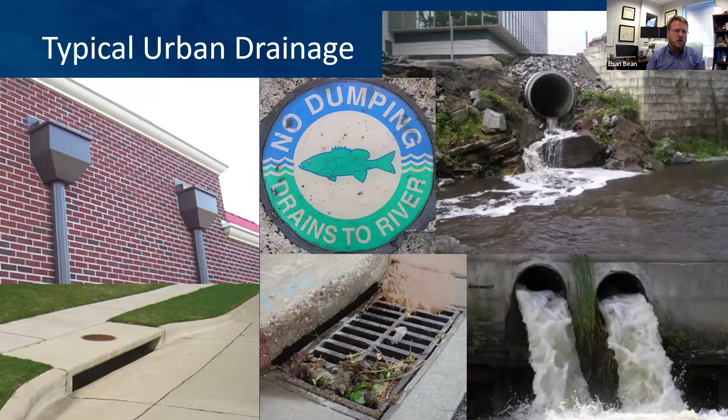And so this has created some issues. One of them being that if you're getting all the water off site, that's good for you. But if all that water is coming to you and your property is the one being flooded out, it's not such a great situation.

One of the other aspects of this is that there's a wide range of pollutants that can be transported from the urbanized or developed areas through that runoff, anything from nutrients, which we see the impacts of in algal blooms, whether inland or on the coast. We have sediments, pathogens all over the place, organic debris and atmospheric deposition as sources of that material, and then metals and other complex compounds.

Eventually, our approach really started, and this is not just in Florida but across the country, trying to address the most common pollutant everywhere, it seems, other than Florida, which is sediment, using stormwater ponds to capture that water. As that water slows down entering the pond, that sediment drops out. These ponds were also initially designed for flood control, capturing that water, slowly releasing it, and limiting the flow rate so we didn't have downstream flooding and channel erosion.

And our sort of conventional approach has evolved to this day to be fairly efficient from the drainage side, getting water off-site from our impervious source areas, rooftops, driveways, into gutters, into storm drains, and into the ponds. One of the things that's happened is, as sediments were pretty effectively removed from stormwater ponds, there was an assumption that a lot of the nutrients could also be removed from stormwater ponds.

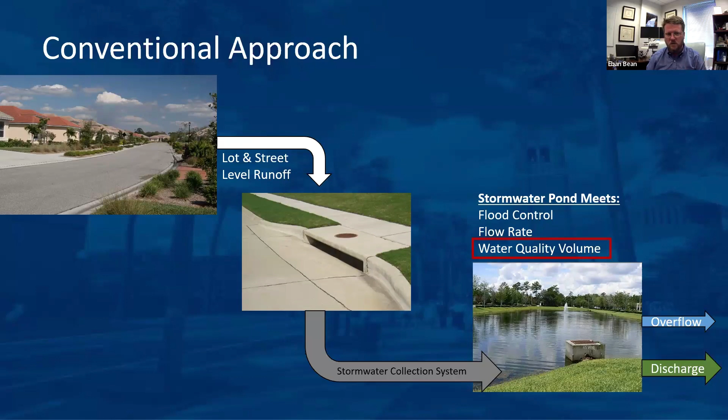This was due to an assumption that nutrients were fairly well associated with those sediments. But if you're familiar with some of the work that has been around for quite a while from Harvey Harper on the function or effectiveness of stormwater ponds, you've seen that many of our ponds are not meeting the presumed criteria or assumed performance of removing 80% of those nutrients.

The graphs on the top are summarized data from the International Stormwater BMP database, just looking at concentrations of inflow and outflow from stormwater ponds in Florida. The trends line up well with what Harvey Harper shows at the bottom. Essentially, what we see with nitrogen is that we get maybe a 25%, maybe 30% drop in the concentration, not looking at loadings. Loadings are at the bottom.

I'll go into the mechanisms for why this is happening in a moment. But we see with phosphorus that we get a much better removal from the concentration standpoint. We get about a 2/3 reduction in that concentration. Comparing that with our loading reduction, that shows that we do achieve that 80% once the detention time gets up near 150, 175, 180 days in the stormwater pond.

And this makes a lot of sense if you understand the chemistry behind it. Phosphorus and phosphate bind to sediment particles, and as those particles continue to drop out, the finer and finer ones taking longer and longer to fall, you're getting better and better phosphorus removal.

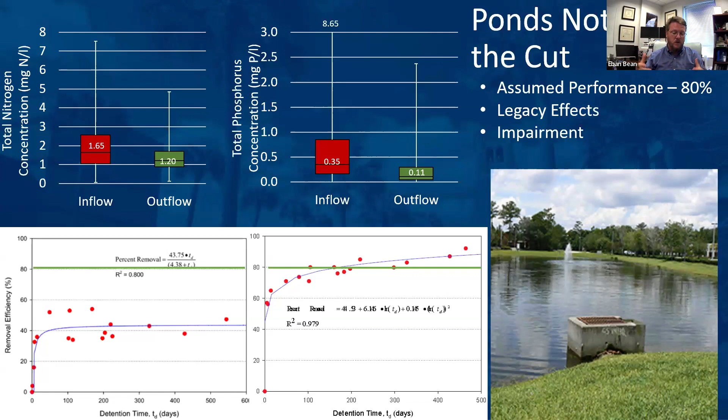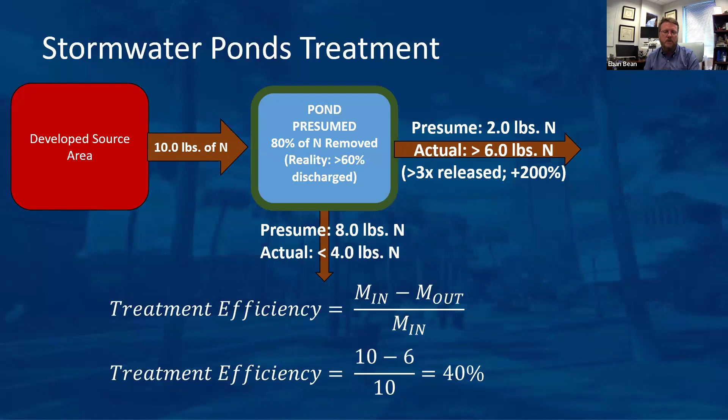And so the assumption that we're removing 80% of our nitrogen from the landscape, this is just a simplified conceptual calculation here: 10 pounds of nitrogen coming off, we're assuming 80% of nitrogen is removed. In reality, maybe we're only getting 40%. Well, that really means we're getting about 3 times the amount of nitrogen that's discharging. We were assuming maybe 2 pounds of nitrogen was being discharged, but in actuality, we're discharging about 6 pounds or more. So that's just laying the groundwork here.

One of the things we see is that our urbanization is essentially driving some of our impaired water bodies.

We look at land use on the right. For this area of Central Florida, we can see that the urbanization, the red areas, kind of overlap with a lot of the areas that are impaired. It's probably an argument to be made that some of the areas not currently impaired on the left are just not impaired yet, or haven't had time to become impaired. If you see the overlay here, there's pretty good agreement between the areas that are impaired and the areas that are urbanized, although to be truthful this looks a little better than many other places in Florida as far as urbanization and impact on urban water resources.

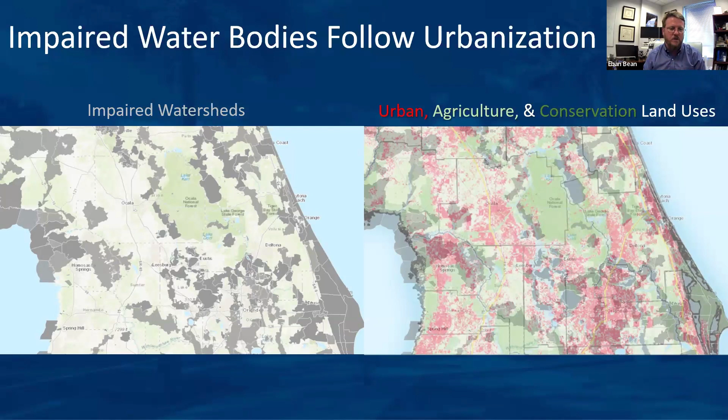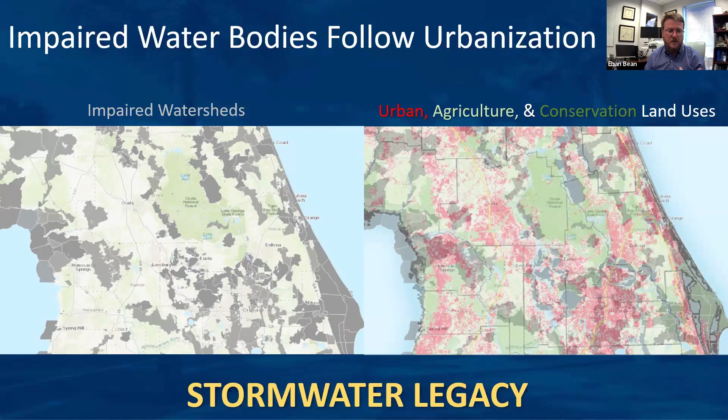But this does create a lasting stormwater legacy, particularly when we think about how difficult it is to come back in and adjust, change, or upgrade stormwater infrastructure that was permitted decades or generations ago.

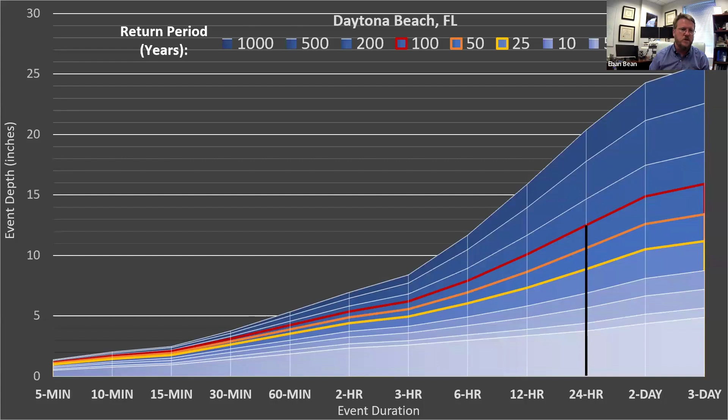One of the things with stormwater ponds is that they're typically designed for that 25, 50, 100-year storm event, depending on the criteria for the location. Let's take a location in this East Central area, Daytona Beach. Looking at the distribution of storm events, we're looking at anywhere from an 8-inch storm event for your 24-hour, 25-year event, up to maybe a 12 or 13-inch event for the 100-year storm. So it's a pretty big storm event - these are typically your hurricanes, your tropical storms, your random cloud burst storm events.

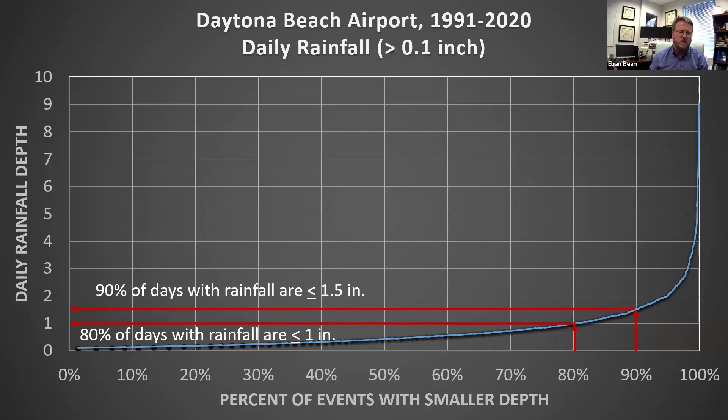The flood control and flow rate control aspects of detention ponds and stormwater control systems are kind of at the opposite end of the spectrum from the water quality size storm events. These are the everyday afternoon storm events that are transporting nutrients off the site. It's important to understand that these are happening at very distinctly different timescales.

When we think about how this has occurred over time, our stormwater management goals have evolved over time, since maybe even some of the drainage goals before the 1960s, we had perspectives on needing to manage stormwater in various ways. But there wasn't really a concerted and coordinated effort, particularly not from the federal level, to enact regulations and requirements. Over time we started to recognize the impacts of flooding, and those were the primary - and that still remains the primary goal of stormwater management - flood prevention and flood mitigation, so we can protect people's safety, lives, and property. But over the years, different topics and goals started to come into the overall picture.

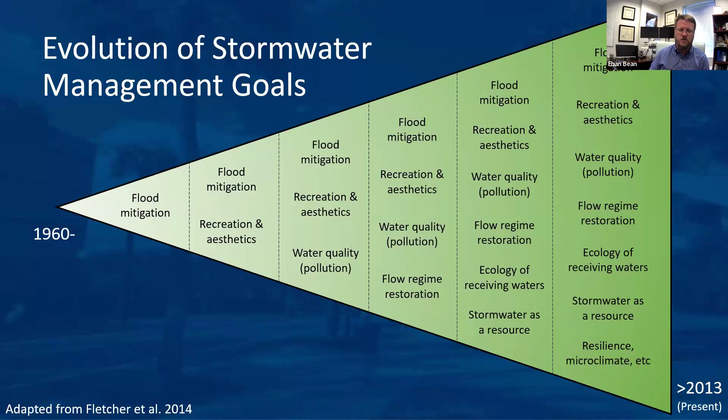Trying to protect the recreation and aesthetic qualities of our water resources, addressing the pollutants being discharged in stormwater runoff, starting to evaluate flow regime and the ecology of the receiving waters and how stormwater management can impact, preserve, or enhance those. And recently, we've seen the emergence of stormwater as a resource, which used to be something just on the West Coast from a water supply standpoint. But we're seeing those water pressures emerging here in Florida, where stormwater is now starting to be seen more and more like a valuable resource to manage.

There's another figure that shows this transition or evolution. This one is a little more up to date, and it aligns with the UN Sustainable Development Goals. And I'm getting to how this relates to nature-based solutions - it really comes into the terminology.

When we think about low impact development, that's the terminology used in stormwater regulations. A lot of what we see here is similar to the previous graph. We had the Clean Water Act, the NPDES program, and then a second generation looking at flow regime restoration—managing the long-term continuous discharge of flow rather than just event-based approaches. A third generation looks much more at the broader holistic incorporation and valuing of stormwater, managing it to improve and maintain the ecology of receiving waters, using stormwater as a resource, improving resilience—a big topic across the state—and addressing aspects of climate change.

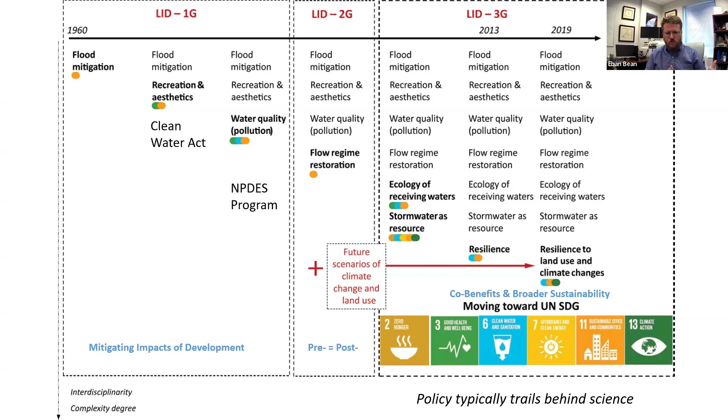One thing we see time and time again, important to put in context, is that policy is almost always trailing behind the science. You'll see that in a moment.

This is another figure, one of the earlier ones that helped me distinguish and understand the differences between these terms. It's an internationally compiled graphic listing different terms based on the primary focus of the term. On the vertical axis we have urban stormwater management, but also broader whole urban water cycle management—think of one water supply relating to urban stormwater management. On the x-axis, it looks at specific techniques, whether structural or non-structural, expanding into less structural practices, concepts, and broad principles.

All of this is under the umbrella of green infrastructure. Here we have different terms like water sensitive cities, which have that integrated urban management—a very broad, conceptual principle that ranges from whole urban water management to stormwater management practices. Low impact development, low impact design—we'll get into those definitions in a bit—are again conceptual, broad principles with a specific focus on stormwater management, but link to and reach up toward whole watershed or whole urban water cycle aspects.

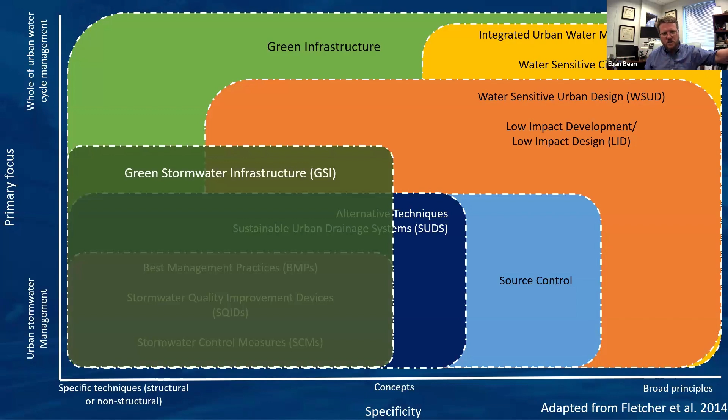Consider the term green stormwater infrastructure, understanding that infrastructure is essentially everything that provides services to society around us. We have telecommunications infrastructure, wastewater infrastructure, power and energy infrastructure, and stormwater infrastructure—typically our pipes and drainage, control structures that manage stormwater flood control and other goals of water quality and so forth.

The green aspect here is really two things. Number one, the green is the vegetative side, bringing in the living or biological component to enhance stormwater infrastructure or utilizing vegetated systems as part of our green stormwater infrastructure. As a comparison, there are examples of green infrastructure that don't necessarily apply to stormwater infrastructure, which I'll show in a moment.

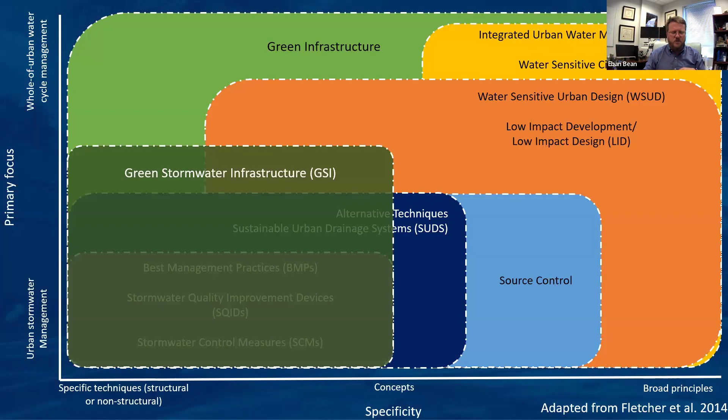We boil this down to look at where there's overlap between these terms and topics. Green stormwater infrastructure, if we break out nature-based solutions and so forth, occupies a very similar space. Nature-based solutions, green stormwater infrastructure, and LID are oftentimes used interchangeably—and at first, that's something I did too. But I hope by the end of this you'll have a much clearer understanding of what those terms mean and what practices fall into one but maybe not the others.

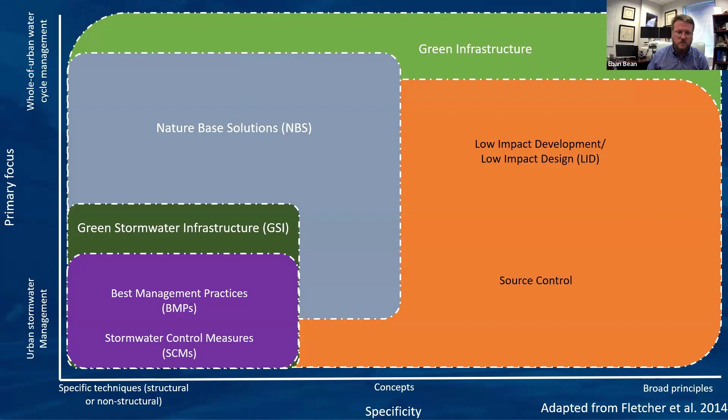I've tried to simplify this and plot out where nature-based solutions fit. I think of nature-based solutions as essentially natural infrastructure that solves or addresses our needs or provides services to us. Green stormwater infrastructure is primarily focused on stormwater management, but nature-based solutions can be more than that.

So if we look at examples of practices that map onto this, we can start to understand where they fall. In the best management practice or stormwater controls category, we have stormwater ponds, permeable pavements. Permeable pavements are sometimes green stormwater infrastructure, but they don't necessarily have the vegetation there. Infiltration practices are kind of the same thing.

As we get into stormwater wetlands, bioretention, green roofs, vegetated buffers, those are obviously green stormwater infrastructure, but they're also nature-based solutions. They have vegetation and rely on natural functioning and natural processes. You can even think of the self-organization of ecological engineering principles—that's essentially nature-based solutions and green stormwater infrastructure.

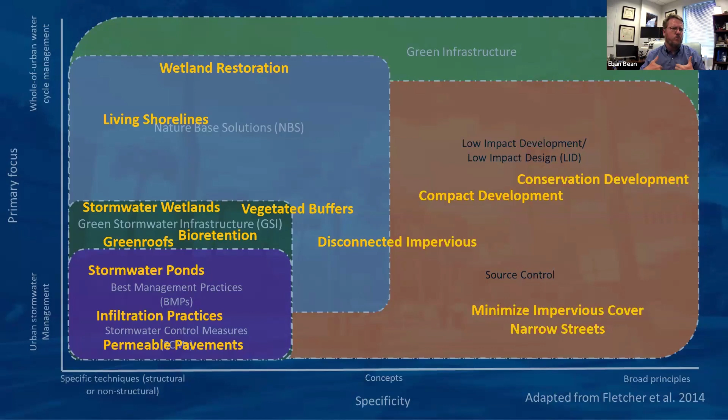Living shorelines, though, don't necessarily provide a lot of stormwater benefit in stormwater management. They secondarily do by preventing erosion in a stormwater practice, but living shorelines themselves aren't directly managing stormwater. Same with wetland restoration, and I want to distinguish that from stormwater wetlands. Wetland restoration is a nature-based solution—we're enhancing the natural system to improve water quality or retain water—but the primary goals aren't necessarily focused on stormwater management.

As we get into low impact development, these concepts overlap in this space, utilizing strategies like disconnecting imperviousness to allow impervious areas to drain onto green space. It's leveraging that green space and using the natural function there, tying all those together.

But things like compact development and conservation development are more broad principles about the layout of a site and how we optimize that to fit what the site offers. Other aspects less geared towards whole urban water management might be minimizing impervious cover and narrowing streets. That specifically targets reducing urban stormwater, but it's more of a broad principle or concept. You could argue it's a specific technique, but overall it's not managing the stormwater directly—it's trying to reduce the amount being generated.

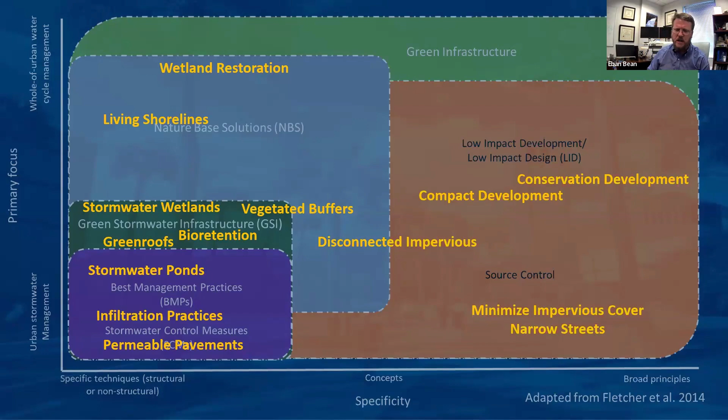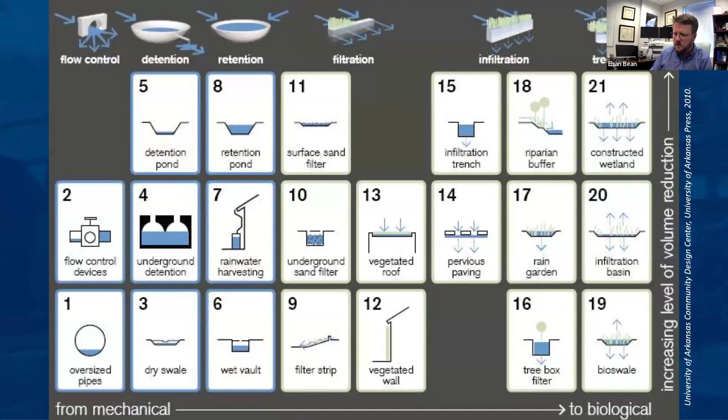So thinking about the distinction between nature-based and green stormwater infrastructure, this diagram helps illustrate it between stormwater practices. I like how it goes from mechanical to biological—just a note, the reference for this document is on the vertical axis on the right. Essentially, how are we migrating from typical stormwater management on the mechanical side to incorporating biological and ecological systems to provide services for stormwater management and treatment in our urban areas?

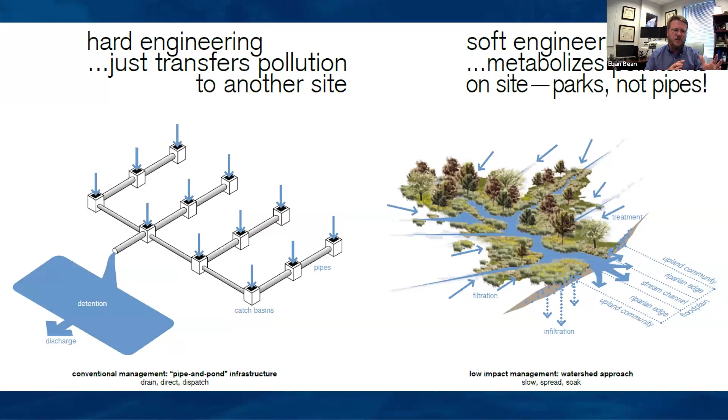If you think about this from a simplified, big picture concept, our conventional approach looks at pipes, catch basins, and ponds, which hasn't necessarily given us the best water quality treatment and efficacy. While the optimal picture on the right isn't a realistic image for an urbanized area to fully achieve or replace, it does touch on the approach of how we incorporate natural solutions into an urban area to provide similar or enhanced functions over the conventional approach.

So as I mentioned, I've started to differentiate between low impact development and green stormwater infrastructure. This became particularly apparent, as I'll show you, when we think about how regulations come into play or where those regulations are coming from. When we talk about low impact development, this really is the site planning and design strategy.

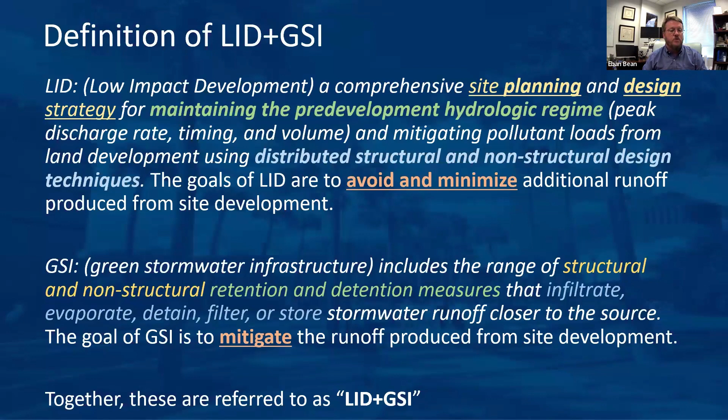This is at the very beginning of the site development process, looking at how we minimize how much of the site is altered and how much runoff is produced, with the goal of trying to avoid and minimize that runoff from the site. Green stormwater infrastructure are the types of practices—you can think of these as the nature-based solutions—put in place to retain, detain, filter, and store stormwater in the urbanized or developed area to mitigate what couldn't be avoided and minimized. So there's a lot of overlap there.

And this is what I mean by LID and GSI or nature-based solutions, going from the beginning of the development process through the engineered final plans. When we start out with a site, a lot of times the goals are mapping the natural infrastructure and looking at how we avoid disturbing this.

This is the conceptual broad principle of how we are strategic with where we place developed areas within the overall site to minimize those impacts. Then we're looking at minimizing the runoff by limiting those areas, enhancing or preserving some of those pre-development hydrologic features, and integrating practices that reduce or disconnect some of those impervious areas.

Finally, when we think about the water that could not be avoided or minimized from the site, that's where mitigation with GSI, nature-based solutions, and even our stormwater ponds for flood control come into play, employing those natural processes to perform the ecosystem services needed to achieve pollutant load reduction, flood control, and so forth.

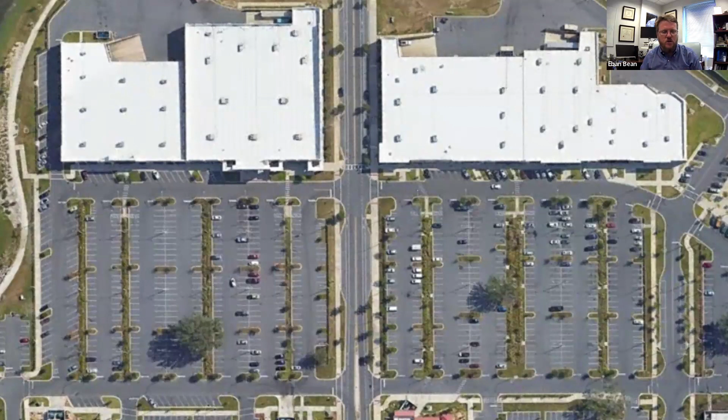However, there's a lot of parking and a lot of rooftop and a lot of imperviousness here, so it doesn't show efforts to reduce or minimize that imperviousness. Although you could argue maybe there's some attempt to disconnect the imperviousness with the swales or bioretention between the parking stalls, overall it's really more of what I would call green stormwater infrastructure, but not necessarily low impact development.

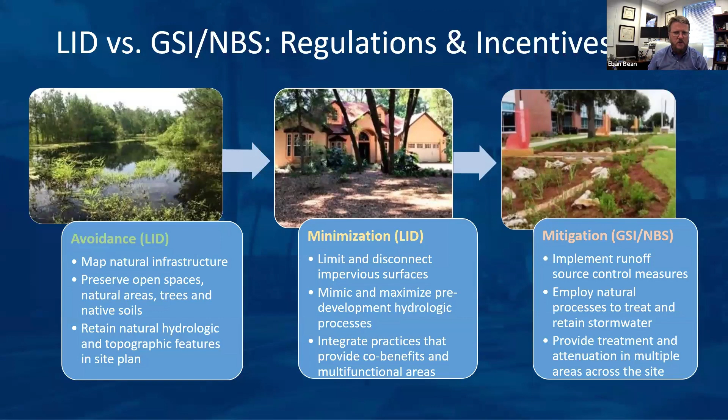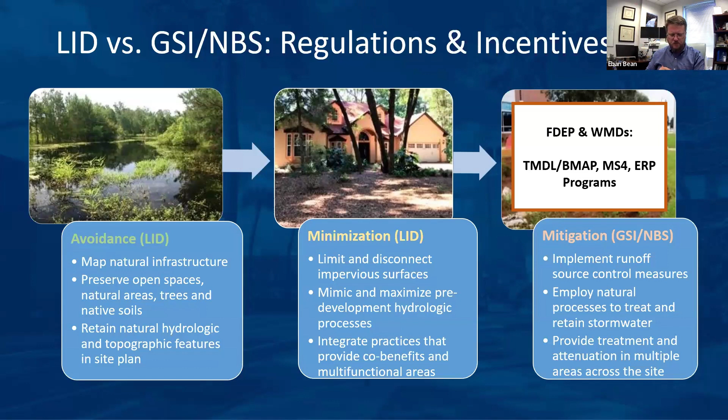Coming back to this concept and getting back to regulations and incentives, the regulatory structure that affects these processes as we think about the development timeline is a bit different. When we think about GSI, the green stormwater infrastructure, this falls under the DEP, water management districts. This is where the ERP program comes in, and a lot of the alphabet soup of TMDLs, BMAPs, MS4s, and so forth. A lot of that is really driven or controlled from the Clean Water Act, from the federal programs down to the state level and water management districts.

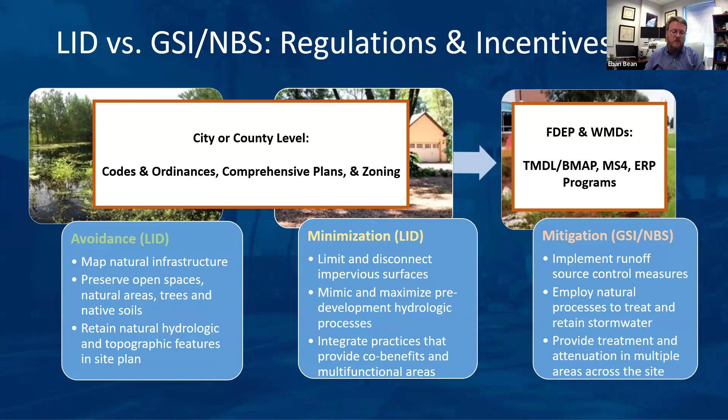But the other side of this, of the layout and how a site is designed, a lot of this comes from the local constraints and approval process that happens. And so there's a lot of things that can actually be done at the local level to improve and provide a fertile groundwork for green stormwater infrastructure and nature-based solutions.

One of the things that happens with codes over time, I was talking to someone recently. I said, codes and ordinances are not like a brand new house that was all well planned out and designed. It's like a house from the 1920s that has had 7 or 8 different owners, and each one had their own vision of what the next add-on or remodeling needed to be, and none of it really flows together. There's different flooring in different places. And so a lot of times there's unintentional consequences or unintentional restrictions or prohibitions that affect the use of green stormwater infrastructure practices or nature-based solutions.

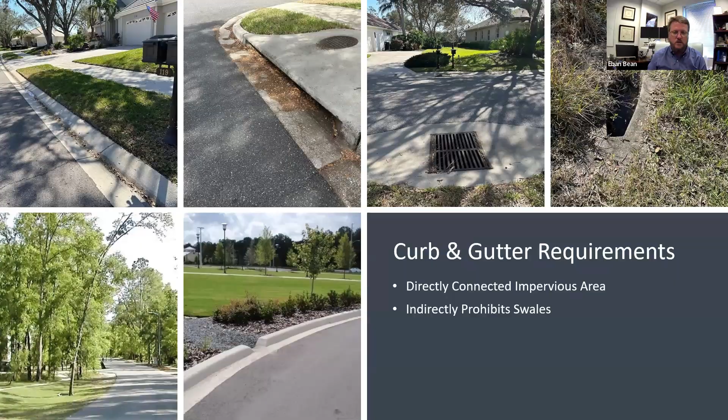One of those, for example, is the requirement for curb and gutter. This essentially requires that impervious areas be directly connected. If you were required to have a continuous curb along a street, there's not the opportunity for that to have a break in the curb and water to discharge into an open space that might improve the water quality, reduce that runoff, and reduce the overall runoff calculations. That sort of indirectly prohibits swales.

The use of traffic islands and medians, there's regulations or local codes that restrict or prohibit how those islands can be used. If there are limitations on being able to utilize that space, that green infrastructure opportunity, then you're not going to be able to take advantage of that and incorporate it into the stormwater system.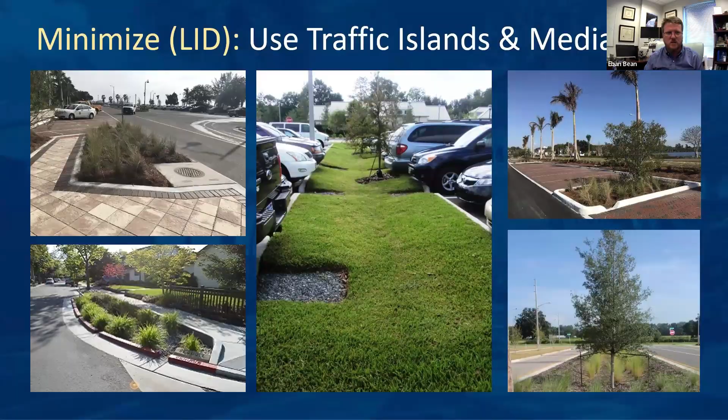This looks at another lens on this same site: the relationship between high parking amounts or minimum parking requirements based on square footage of the stores or businesses, and the overall imperviousness. This is particularly relevant to commercial and residential codes, where it essentially artificially increases the amount of impervious areas. There are some opportunities to change the requirements to allow, for example, pervious parking in some of these, or reduce the parking requirement minimums.

Particularly when there is seldomly used space or timing differences for businesses operating at different times—for example, maybe you have a store that operates typically 8 to 5 Monday through Friday, and next door is a house of worship with a service once a week, when the majority of parking they need is being done, and those don't overlap. There's not necessarily a reason to have duplicitous parking for both of those.

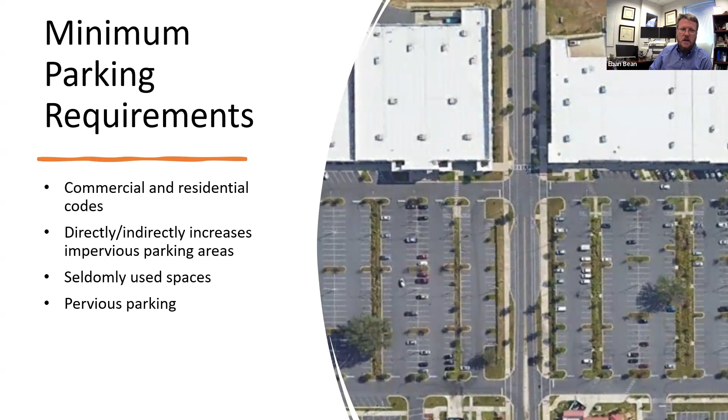One of the things we've looked at doing, and helping communities to do, is audit their codes and identify where these restrictions or prohibitions are. We developed a tool that helps identify weak areas that could be addressed or improved when the opportunity is right—for example, when the county or city commissioners makeup is open to making changes or wants to prioritize those changes, this is one tool available to be used there.

The code audit tool, just to touch on it, breaks the code audit process into about 16 different categories, and every question is scored on a scale from 0 to 4 based on how it is either prohibited all the way up to being a required practice. That scoring provides the basis for identifying where you have higher scores, or stronger codes, versus lower scores that are maybe not as encouraging, or are more restrictive.

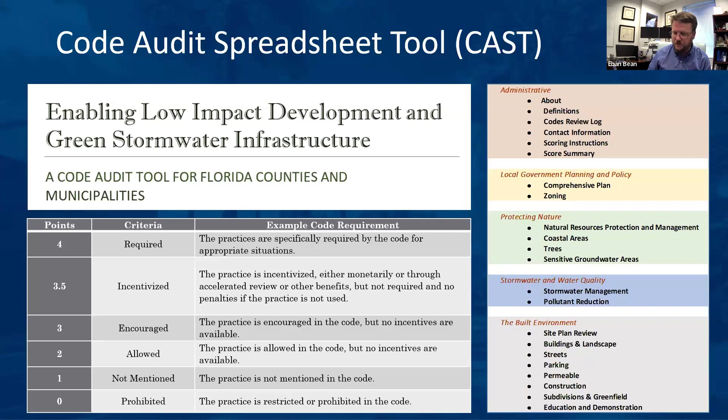But the other side of this—we talked about the local side, but there's been a lot going on the state side and the ERP side. Many of you are probably familiar with the recently passed and approved stormwater rules for the ERP program that are going to essentially take effect around the middle of next year.

Some of the main changes were changing the way criteria is defined, from a presumptive criteria to a technical, or basically technology-based, criteria—I'll touch on that in a moment. It also looks at the aspect of net improvement and performance standards, making sure that's more uniformly and consistently applied. It also provided a way to offer additional stormwater practices, BMPs, GSI, or nature-based solutions that can be used rather than having to go through such a huge process. It provides a framework and a list of those options.

I think it provides a groundwork for this being able to evolve and become better over time. One of the other main things was that it strengthened the requirements for operation and maintenance of stormwater systems. I'll talk a little bit about that here in a moment later on—we're involved in some aspects of that.

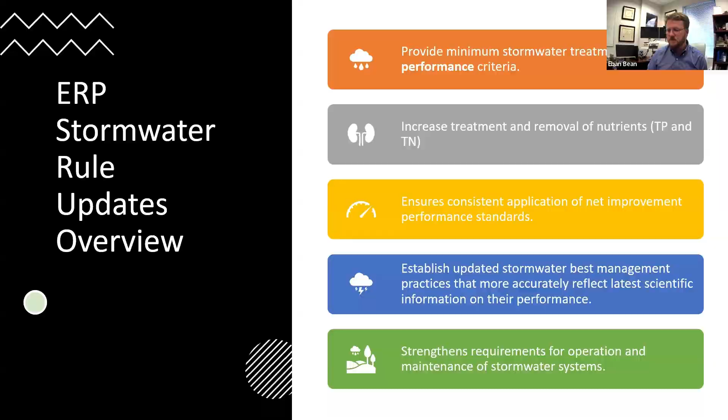Just to touch on more specifically the change happening with the stormwater rule: the water quality requirements for stormwater are going from this technology-based presumptive compliance to performance-based. I apologize, I think I used technology-based where I meant performance-based on the slide before. But essentially the structure overall is going to remain mostly the same, other than how you determine the performance of certain BMPs and how they're going to achieve the load reductions.

For example, one of the things that has changed is that for all non-impaired sites, instead of total nitrogen having to be reduced by 80%, it only now needs to be 55%. But that's not a presumptive compliance—that is performance-based, and it has to be based on data collected and monitoring of those practices to show how they are actually achieving that.

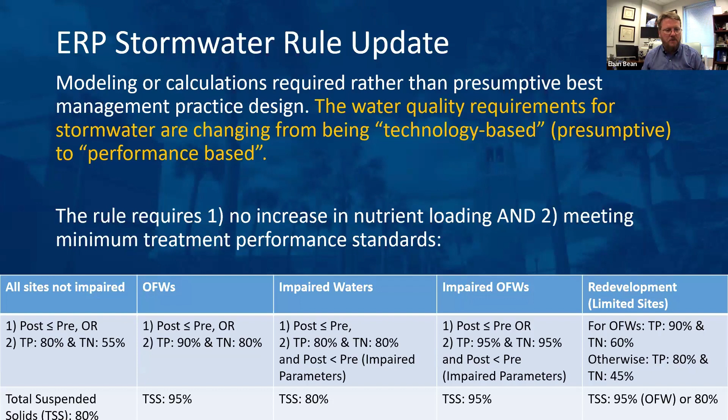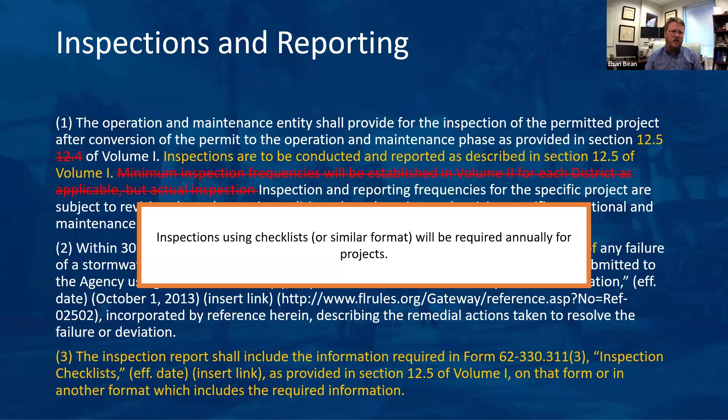Most of the other removal rates are staying pretty much the same, but notice the pre- or post- also has to be achieved—so it's sort of an 'and,' keeping that in mind as well. For inspection reporting, essentially inspections are going to have to use a checklist or similar format included in the rules, and these are going to be required annually, or maybe every few years for projects, but that's going to have more of a formalized process.

So what do we do here? There's sort of two aspects for addressing some of these new rules with the stormwater, the ERP program. One aspect is reducing the overall stormwater that's generated from the disturbed site. So how do we do that?

A lot of this is looking at the aspects of low impact development, planning, site design, and that can be achieved at the local level—reducing our disturbed area, going for more compact or cluster development, reducing some of those parking areas or parking minimums, and looking at aspects of LID, disconnecting imperviousness, and how those disconnected portions can reduce the runoff being generated and the loadings, and incorporating in some cases GSI or nature-based solutions in the landscape or disturbed area that are not necessarily for the water quality credit, but to reduce your runoff curve number.

Now, if you're using GSI practices for water quality, there are ways to do that, and I'll touch on that in a moment. But that is the other option: sort of how do we, if we can't reduce the loading increase, we can improve or increase our load reduction and treatment train practices that are in the system.

What this aspect looks like is essentially moving a lot of the water quality treatment, or a portion of it, upstream of our flood control practice, which is our typical orientation. So how do we improve or incorporate different BMPs or GSI, nature-based solutions for water quality treatment into the landscape? Think back to those dead spaces, maybe in the right-of-way between the street and a sidewalk. We might be looking at opportunities to take advantage of that space to capture and treat a portion of runoff, not necessarily flood control, but an additional incorporation of function into the landscape.

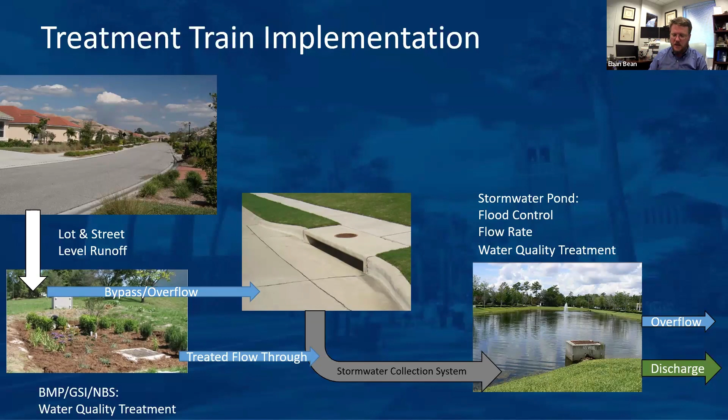When we look at the treatment train and putting these practices in series, this is what I'm getting at as far as like a portion. We're not looking at GSI necessarily having to take on a huge burden of the nutrient load reduction.

So here's an example of how this might be achieved with a stormwater pond. Let's say the stormwater pond is designed so it has the detention time that reaches a 44% nitrogen removal, and we're trying to get down to a 55% reduction. Well, if we back it out, the pre-treatment upstream of that pond really only needs to be about 20% of the nitrogen that is coming into it. So it doesn't need to remove 70, 80, 90% of the nitrogen all in that GSI or nature-based solution, that BMP. It's really just a small portion, but that's got to be the workhorse for consistently providing that amount or percentage of our nutrient load reduction.

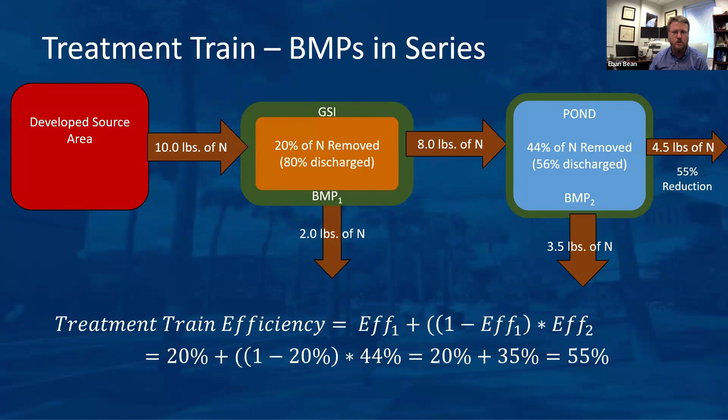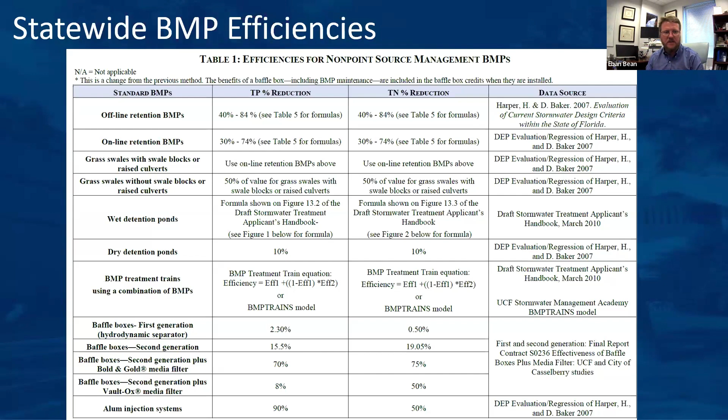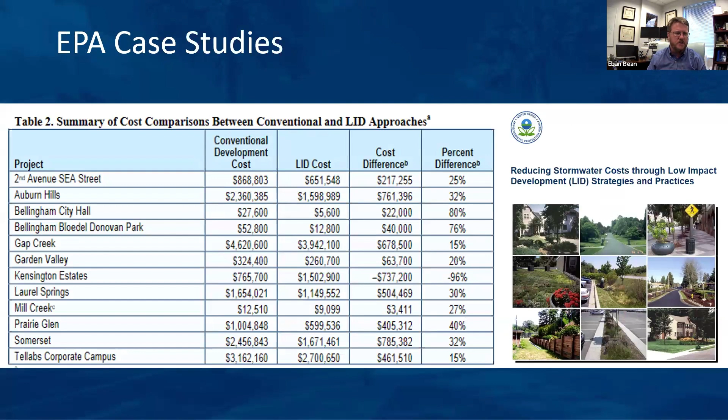This is sort of a summary, illustrated. This was a study, a review of some designs of sites that EPA did, looking at different costs. If you look at these, you have the conventional development costs, LID or conservation or GSI development costs, and the cost difference, the percent difference. If you notice, there's one that is negative, right? And it's sort of strange, like why is this one so much more expensive with the LID? It's essentially twice as expensive.

Well, we can always make bad choices, and I'll go back to that green roof cost aspect, an example where maybe the best selection wasn't made. If we look into the details, we find that this LID proposal also included rooftop rainwater collection systems on each house. If we try and put a rooftop collection system on top of each house, the cost of that is going to outweigh doing almost any other type of practice on a per lot basis.

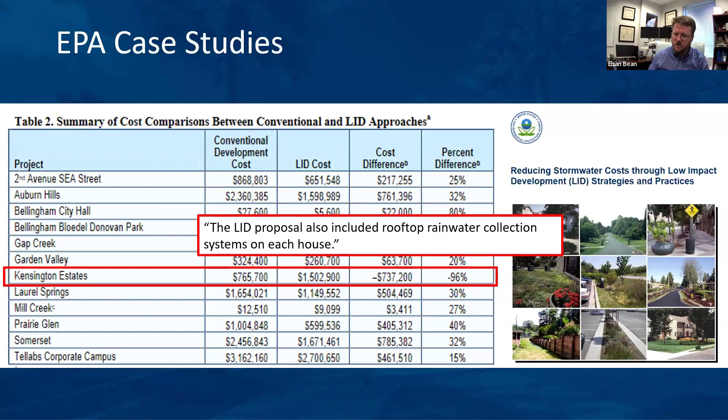Even if we did all permeable pavements and bioretention, doing that kind of implementation is not a wise or cost-effective solution. The white projects here are the ones from the previous slide, showing the different LID techniques, with the Kensington Estates one highlighted as the expensive example.

If you notice, it's a little bit different. What stands out from the practices used on this site versus the cost-effective ones: all the others essentially used bioretention, only a few used permeable pavement, some used reduced impervious area, and they used swales on all the other practices. So utilizing low-cost practices is one of the main ways to incentivize making these projects cost-effective.

LID and GSI does not mean putting green roofs everywhere and paving everywhere with permeable pavement, although there are situations within the development continuum where those make sense. Green roofs make a lot of sense when you have no other option and a high premium on reducing water quality size storm events in an urban area, with no other space to achieve that function.

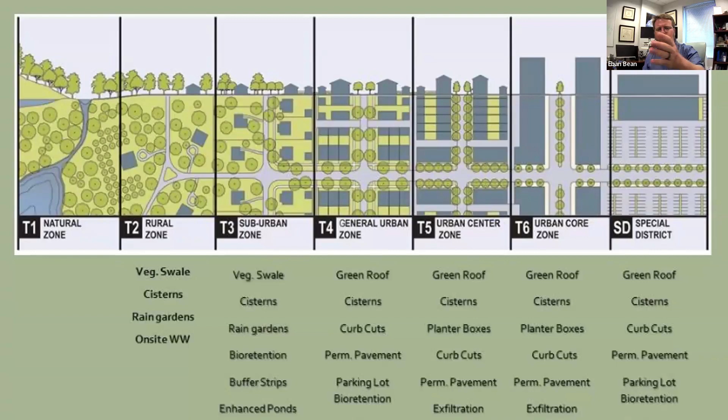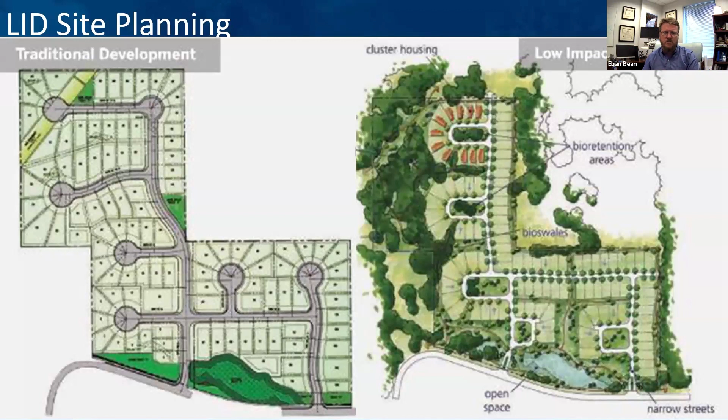This is really what an implementation of LID site planning and green stormwater infrastructure might look like. On the left, we have complete clearing and maximizing of lot sizes with wide roadways. On the right, we've utilized select design principles: narrowing the roadway, incorporating bioretention and bioswales, low-cost stormwater management practices, and a large area of conservation, reducing the imperviousness.

I'm going to skip over this case study in the interest of time, but essentially it shows that when we offset the amount of curbing, stormwater pipes, catch basins—that concrete which actually costs a lot in our stormwater drainage system—that frees up a lot of additional funding to be repurposed into green stormwater infrastructure.

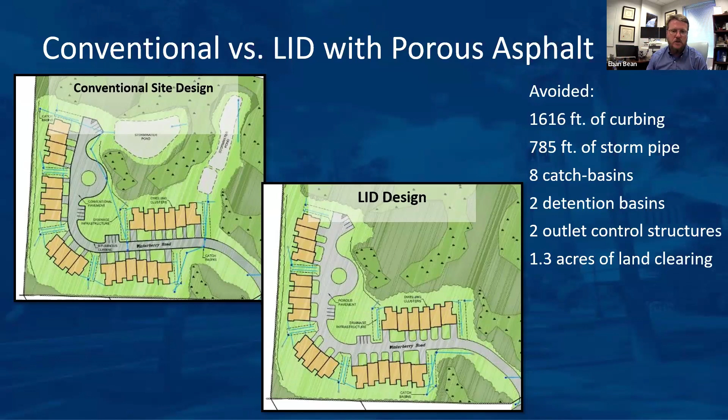In this case, they used permeable or pervious asphalt to reduce runoff. It increased their paving cost, but was essentially a bit of a swap. They also reduced the need for detention basins, outlet control structures, and the amount of clearing needed. By freeing that up, we were able to repurpose those costs—we have a cost breakdown showing that on the site, essentially creating a very high-functioning site on a lower footprint with a better site design.

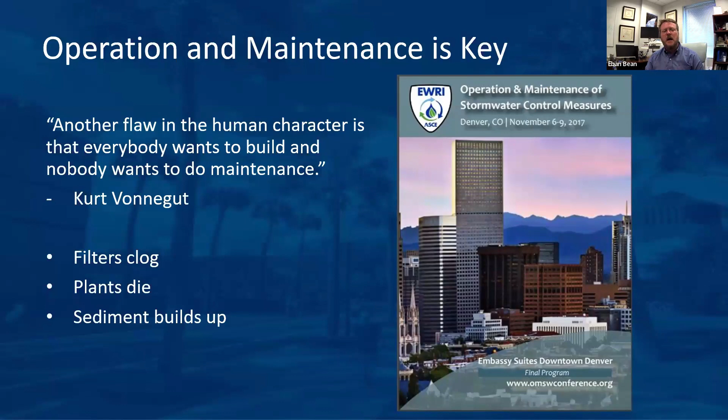I will touch on operation and maintenance being key. One of my favorite quotes that applies to urban stormwater management: another flaw in human character is everybody wants to build and nobody wants to do maintenance. It's important to compare apples to apples—the operation and maintenance required for a highly visible bioretention cell, for example, shouldn't be compared to deferred or avoided maintenance in a hidden stormwater pond. Those aren't looked at from the same perspective.

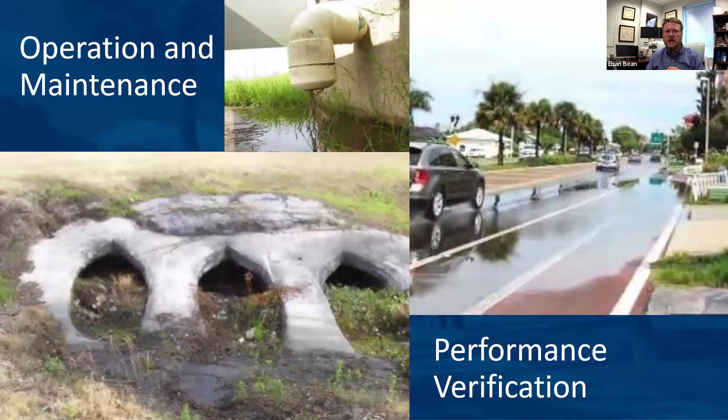One aspect to consider is short-term replacement costs versus routine maintenance costs. Those can really vary when comparing GSI and nature-based solutions with conventional stormwater infrastructure—looking at the trade-off over the life cycle of the system, where routine maintenance could be higher for GSI, but the replacement cost might be lower. For example, replacing a stormwater pipe versus regrading or cleaning out a swale a few times—those are the appropriate comparisons.

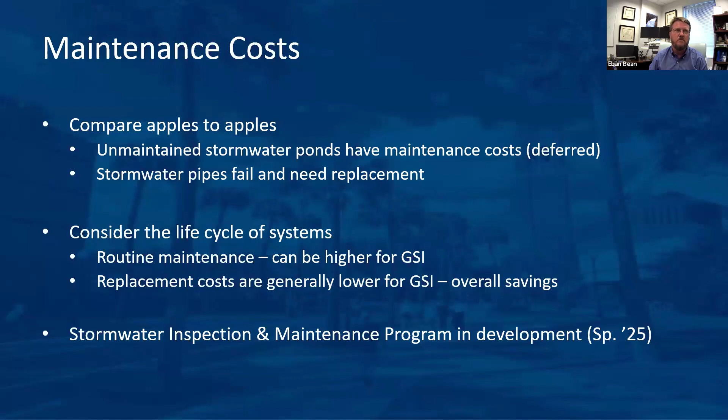I'll also note that we are working on a stormwater inspection and maintenance program to satisfy the requirement for those who are not PEs, or not working under a PE, who would be doing stormwater inspection and maintenance as part of the new requirements for the ERP rule. That will be released tentatively in spring '25, ahead of the effective date of the new rules.

Just want to touch on a few things here. LID really starts at the beginning in site design, looking at how we implement those broad principles and concepts early on to reduce, avoid, and minimize the amount of runoff that's generated and utilize what the site offers.

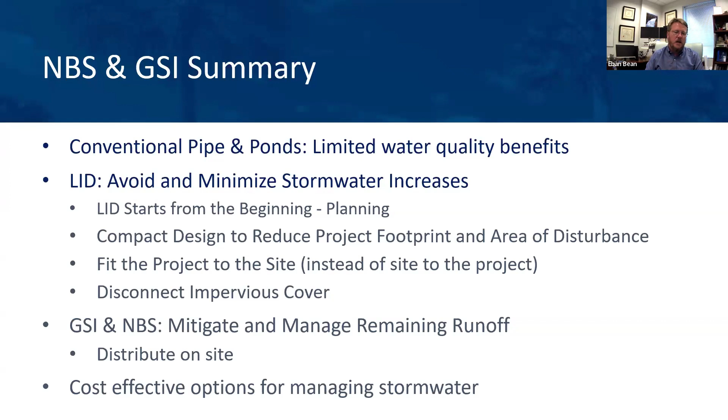The GSI and nature-based solutions are great opportunities to mitigate and manage what runoff could not be avoided, while also providing additional benefits of aesthetics, diverse vegetation, and cost-effective options for managing stormwater.

There are several sites with resources, like the Florida Friendly Landscaping Program. If you go onto the Green Stormwater Infrastructure site, you'll see some of our resources for green infrastructure maintenance and planting tools, as well as our webinar series and inspection checklist.

We also put together a website with photos of high quality GSI projects around the state, with additional information and background on each site. Some of them are definitely within this region, so check out gsiphotosflorida.org. It's a great way to help illustrate these types of practices to those who may not be as familiar.

And I'll put a plug in for GSI.floridadep.gov. This is the clearinghouse for all their GSI resources, providing information for those who are novice all the way to technical experts. So with that, I'll be happy to answer some questions.

We have a few questions, more than a few, in the chat. Should I read those, or should I get them to you? Where should I start? Let me see if I can pull this up. All right, hold on just a second. I've got one.